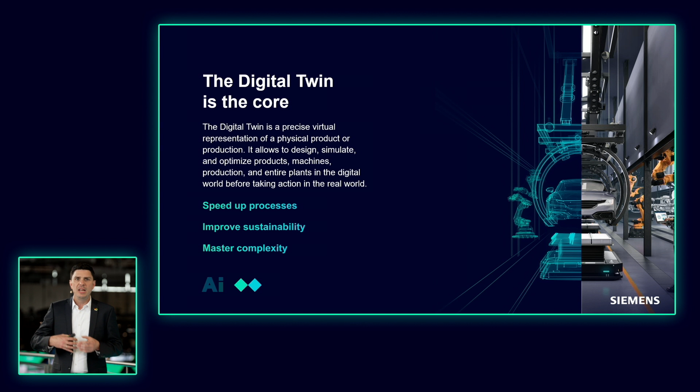So what is the digital twin? It's a digital representation of a physical asset, of a process or whatever. We have different digital twins, so it speeds up processes, it improves sustainability, and also helps master complexity. But we also talk about the comprehensive digital twin. And why are we talking about the comprehensive digital twin? Because we have different areas where the digital twin is applied.

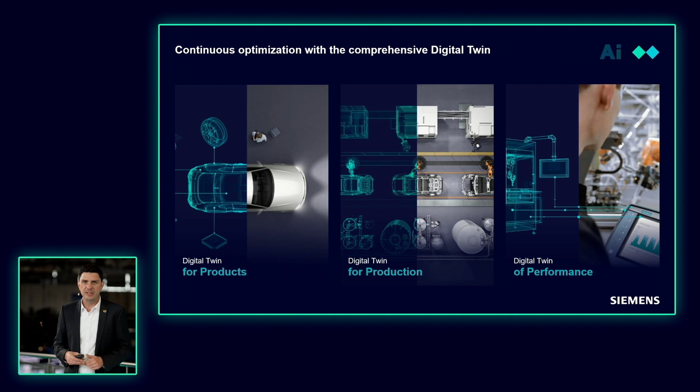So we have the whole topic of products, product design, and so on, like a car, but also a ship, plane, whatever it is, chemicals, liquids. Then we have the digital twin of production. This is also my home turf, right? It's industrial systems. So how we make this on the machine, line, and plant level. And then we have the digital twin of performance. And if we combine all those, then we have a comprehensive digital twin. And in each of those disciplines, we have different levels of granularity.

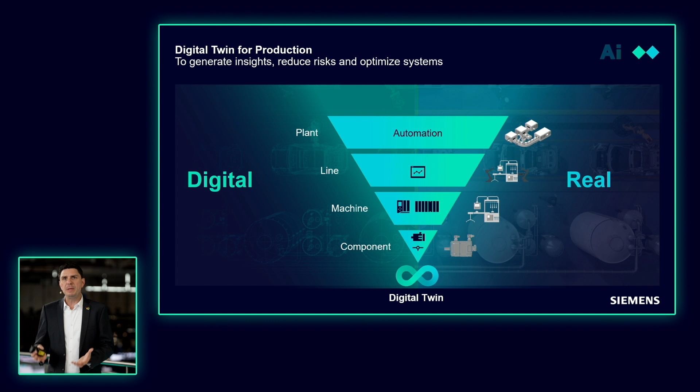And now looking into the digital twin of production, one step more detailed, we see on the left-hand side the digital world. And in the digital world we have, as I mentioned before, components. That means we start on a component level with the behavior of components. We talk about machine level, line, plant, up to manufacturing execution systems or manufacturing operation management.

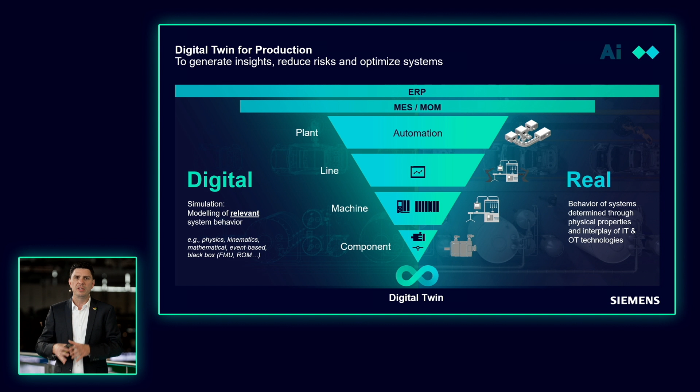And important is that we have a real digital world which has the same behavior as the real world. In the real world I have a real behavior; in the digital world I have a simulated, modeled behavior, and I need to assemble all those things together to have a full digital twin. So this is the digital twin part: product, production, performance, comprehensive digital twin, real and digital.

And now let's have a little bit of baselining about AI. We are talking about consumer AI and industrial AI. And what is the thing here? Industrial AI demands much, much more than we know from consumer AI. We can't accept failures. So it needs to be safe, it needs to be reliable. It needs to manage complex things and complex dependencies, and repeatedly in the same quality. And we need to speak a different language, the language of industry.

Now let's look at what AI in industry looks like and which kinds of AI we see there. First of all, at the base, the industrial foundation models, where we have data sources and so on. On top, we can build agents, different agents, but also an orchestration agent orchestrating different agents, and then we have the applications, where through large language models a copilot helps us perform tasks. Through the copilot I can manage agents, and the agents could manage my tools. We will see later how we bring it together. With these agentic AI topics, we are improving workflows, tasks and multi-domain things.

And then we have a second part, physical AI, where we move towards more autonomous production, because we need to train and apply it. For example, a robot knows how it behaves. A robot needs to understand which payload it can handle, what its range is, what it can do. So we have real-world inputs to the robots with sensors, data, maybe video. Then we have trained physical AI, and as output the different capabilities of what such a robot or an AGV can do.

So we have now the digital world and digital twin, and we have now a little bit of AI. Now let's bring it together. I have one example with me today, and we go a little bit into what it means.

If we look, in the past, and still nowadays as well, we have hard-coded tasks. We program something in automation and it will behave and do exactly like we told the system, and we will get exactly the result we coded it for. And then we now have goal-driven tasks. If we talk about these humanoid robots, AMRs, AGVs, or whatever machines, we want to go for goal-driven values and goal-driven workflows.

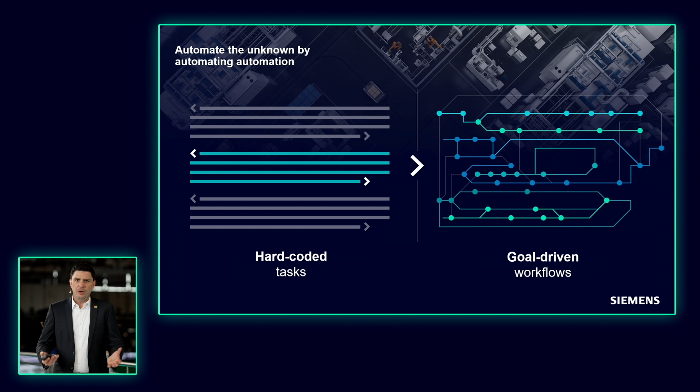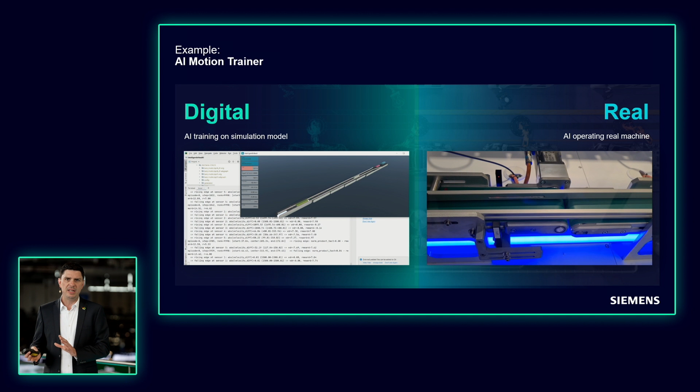And with these goal-driven workflows, we need something different, and we need somehow to make it happen and apply it. So let's take one example of how we bring it together, simulation and digital twin. We have built up a virtual, simulated conveyor. With this simulated and virtual conveyor, I can test, I can code, I can train something, and so on. On the right hand, we have a real conveyor, and we see the real result later on. But let's have a look at how we come to this and how it is working.

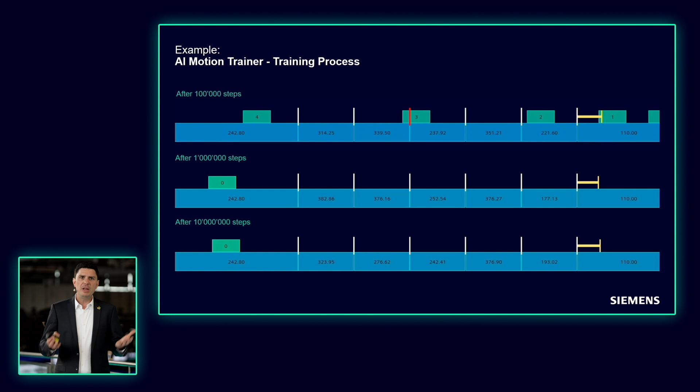Because we need to train. We are now talking about programming something which is not standardized programmable, because we want randomly incoming parcels, and in the end we always need the same output, with the same speed. So we can, in a virtual world, that means a simulated, digital world, start training it before building up something physical. That means we train our AI in the virtual world. And this we can do with 10,000, 100,000, 1 million, 10 million cycles to get the best results.

And this is then also a combination of what we can then bring into our engineering tools, combining it with electric behavior and automation code. So we can now bring all those things we have trained before, how the algorithm should work, so that we get exactly the result, sorting the parcels with the right speed. I can then bring it into my digital twin and validate it again. I can see my performance with NX and Simit and other products.

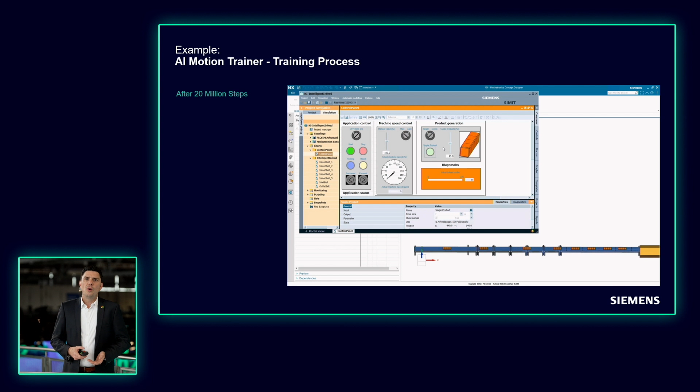And once we have trained it, there's also one more use case: we go a little bit further, and we can now take this algorithm and deploy it into the real world. So in the first step, we trained this algorithm in the virtual world with 10 million cycles, in the end even 20 million cycles, to get really the best result. Then we take this algorithm, which is now trained, proven and tested, and apply it to the real world. And we see in the lower side of the slide that there's a different case. It's not one straight belt, we now have multi-belts.

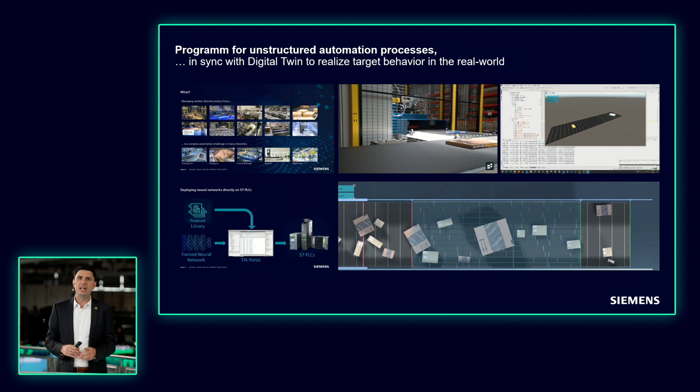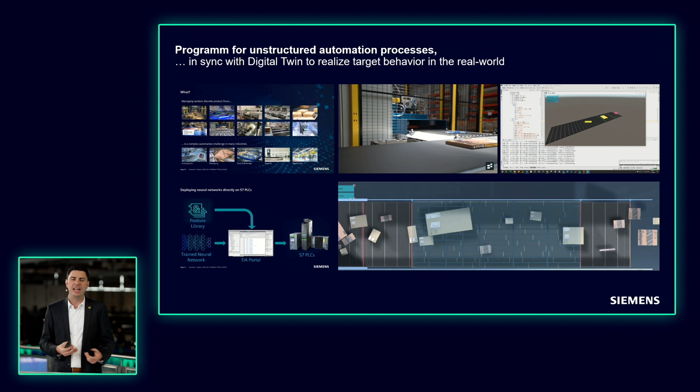And this is where we can say, look, you are a conveyor belt, and you have different speeds and different sizes, and I can basically tell this conveyor part what it can do and how it can behave. So I can now bring parcels in randomly, take a camera, and the system is self-adapting so that in the end, if you look at the right-hand side, all the parcels are in a straight line, sorted and turned. So we see here how we bring AI and digital twin together, why they go hand in hand, and why it's a super match to talk about AI together with a digital twin.

So what you saw here is one example. But we have more examples in different industries and in different combinations of how AI and digital twins could work together and how they benefit from each other by testing AI, training AI, and so on.